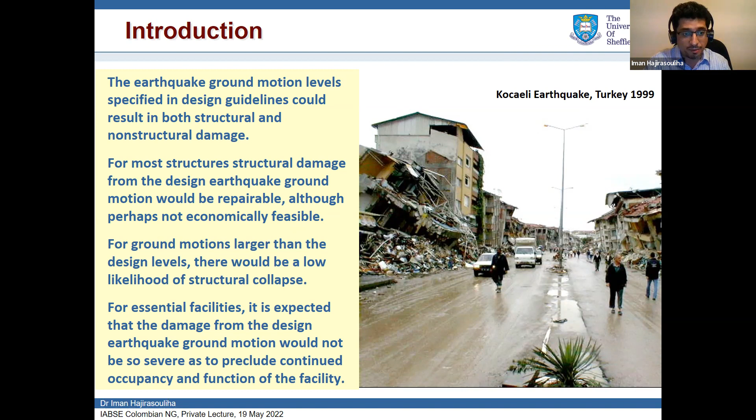The problem historically is that earthquake forces are huge. If we look at other forces applied to structures, like wind load or dead load, we realize that even in the worst case scenario, the earthquake elastic forces are up to 10 times higher than wind. This means we need to find a way to deal with earthquakes. We cannot just design our buildings like we do for other types of loads, for a load that is that strong. So how can we deal with this idea?

There are different ways. One is to isolate our buildings, using base isolation systems that are widely used in some countries. This is not in the scope of my talk, though I'm very interested in that area as well. The other is to increase the damping, absorbing energy using energy dissipation devices. Again, this is not the topic of this talk. Actually, in my next presentation, I will focus on this.

But in normal circumstances, for normal buildings, what we do is design them against a load that is really strong, so we accept some level of damage. We accept that some part of the building will be inelastic. What we do is control this damage so it occurs in the locations we want, so it does not harm, injure, or kill people, and it's restricted to the limits we want. That's the whole idea of seismic design.

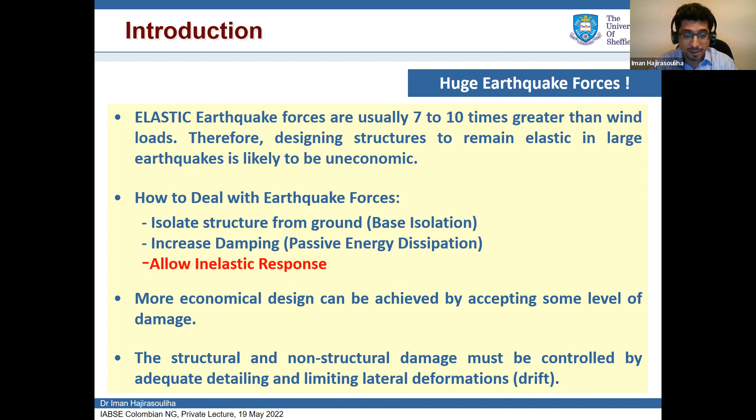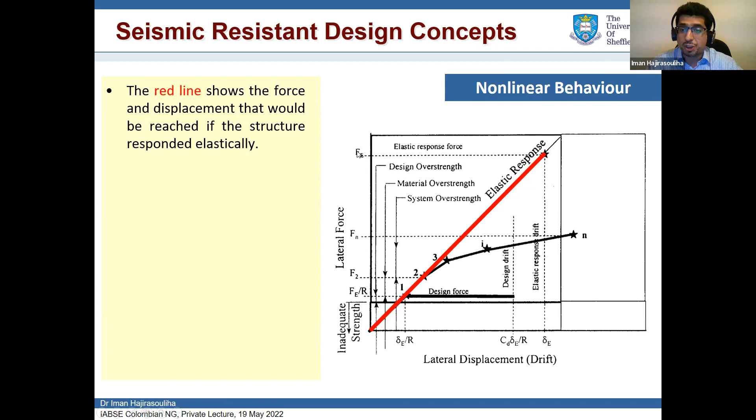Now, this slide is very interesting. I look at the load-displacement curve. If the system is elastic, this is the red curve; everything would be elastic. But this is the load we need to design our buildings with, and it's very high. It means the building would be very strong, with large sections, a lot of reinforcement, or large sections. It's not possible.

If we accept nonlinear behavior, if we accept damage, it means instead of this load, we can design with much less, half of that. It's good because the structure would be lighter, with less material. The idea is that I can make the structure weaker but accept some level of damage, and I can continue doing this until I reach this pink line. At this line, if the structure is weaker, it will collapse completely.

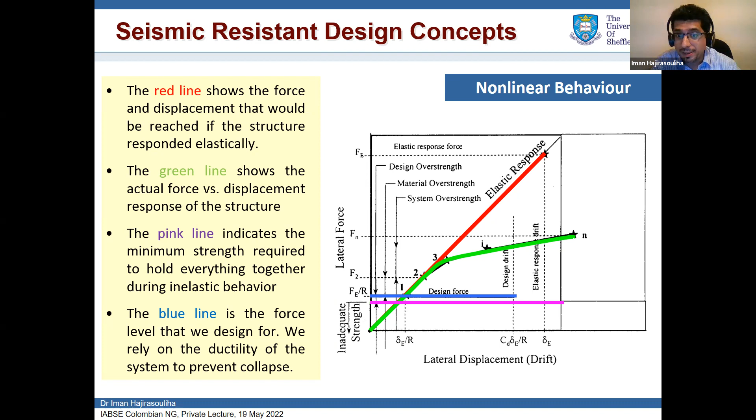So what we do in seismic design practically is that we select a line that is above the minimum threshold. Instead of designing with FE, that is elastic load, you can design with a load much less than FE. It is FE divided by R, where R is the behavior factor. We have it in all seismic design guidelines. So practically, you divide the load by a factor that is generally 6, 8, even 10. You reduce the load, design it, and hope the damage would be acceptable. But can we guarantee that? No, because normal design doesn't give us the tools to do that.

Now this is not that important. I'll go to the different methods we use for design of buildings to calculate the loads in elements. We have it in all design methods. First is linear static procedure, which I explained about. Then linear dynamic procedure, which by itself can be response spectrum method or time history. And nowadays in performance-based design method, we use nonlinear static, which I also explained. And the most accurate one is nonlinear dynamic. I'll go through them quickly and tell you the differences, advantages and disadvantages.

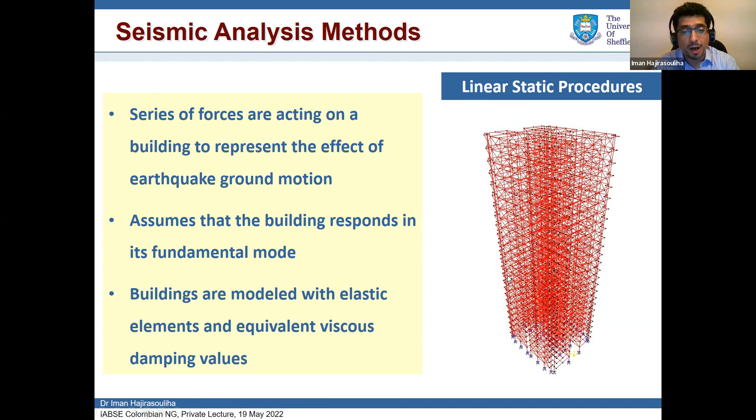Now, linear static means that I apply the seismic load as an equivalent load. It generally assumes that the first mode of vibration is dominant, and the structure is elastic. So basically it's not very good for tall buildings because the effect of higher modes would be dominant. I'll show you how it works.

This is the building, and this is the way that we distribute the load. So we say this is the earthquake, ground vibration. We distribute it, generally with an equation or linearly, and then we analyze it. From now on, the earthquake load is like wind load, any load applied laterally, and you can do it with any software or hand calculation and design. But we know that the effect of higher modes is not considered.

So codes suggest a better design method, response spectrum. What does it say? You have the response spectrum of your earthquake for your location. For example, for Colombia, I'm sure in your seismic design guidelines you have it for different regions. You know the period of the vibration modes for your structure. You do a modal analysis, find the response for each mode, and combine them. Again, the structure is elastic, meaning you assume there is no damage in the building. So practically, you have to reduce the load.

So here is the first mode of vibration, I find the response. Here is the second mode of vibration, I find the response. Here is the third mode of vibration, I find the response. And then I combine these three by using a method like SRSS or CQC very easily.

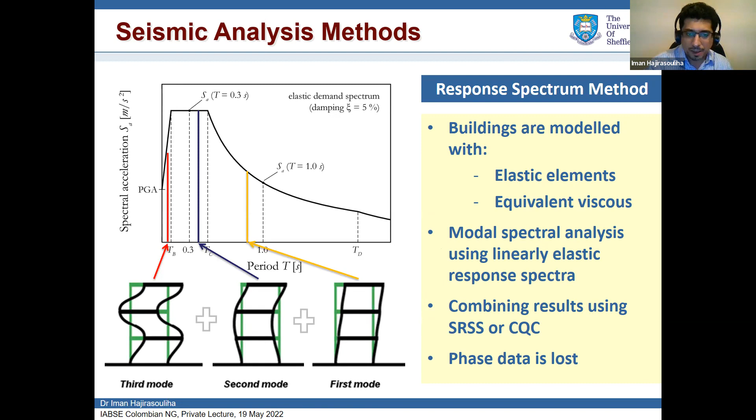But a more sophisticated elastic analysis is to apply the seismic load and perform time history method, linear dynamic analysis. So I show it again. It means you solve the dynamic equations directly. If you had structural dynamics, you'd have heard of the Duhamel integral. If you don't know, that's absolutely fine. The equations of motion will be solved directly. This is good because the analysis is more accurate, and the effect of higher modes is considered.

This is bad because you need an earthquake record instead of a response spectrum. And for seismic design, we are not sure what would be the next earthquake. Do we know? We don't know exactly what the next earthquake record would be. So this will be challenging. Which earthquake record do I have to use for design? Yes. And also, the structure is still elastic.

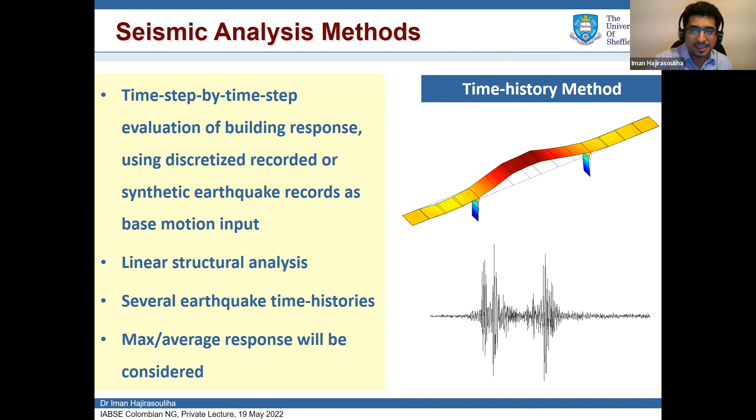So the seismic design codes, the performance-based design codes, started thinking of a method that is easy to do but also more accurate. We want to know the behavior of structures when they are nonlinear, when we have damage. So what they basically propose is pushover analysis, or inelastic, basically a static analysis.

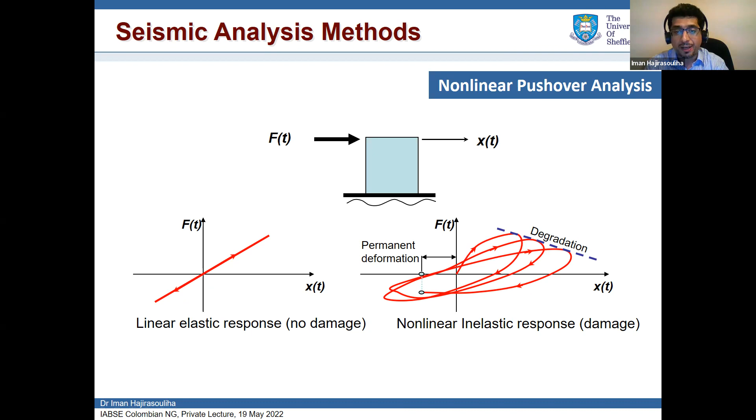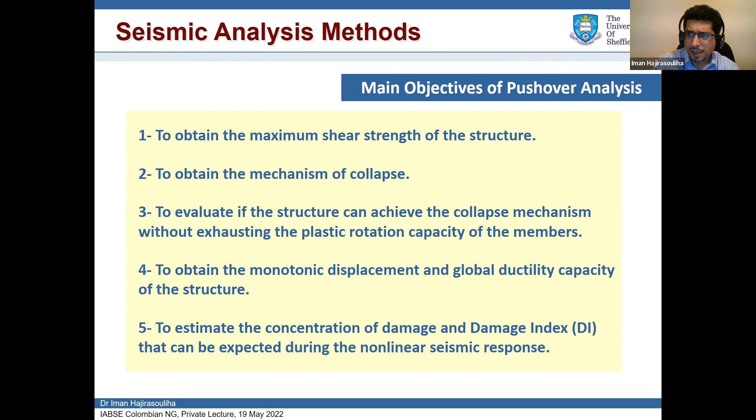I'll give you an example. Oh, sorry. These are the limitations. What are the limitations of this method? The limitation is that it still looks at the first mode of vibration. It means that the effect of higher modes is not considered. If you look at 3D systems that have torsion, irregular buildings like this one, it can't really work very well. There are methods to address these issues, but those methods are still not very accurate, and they are in progress. So pushover is generally good, I would say better for a 2D system when it's regular.

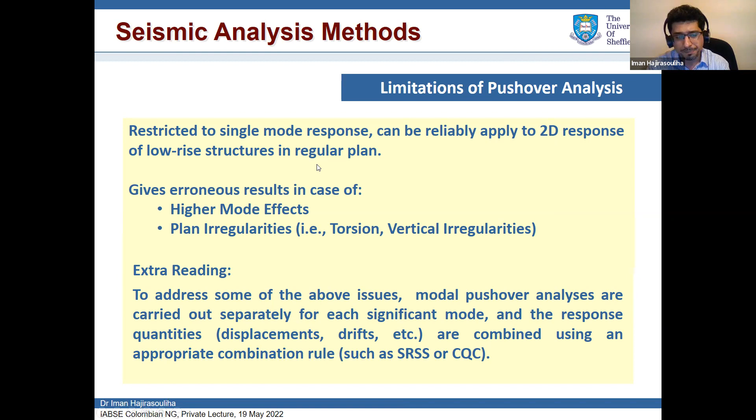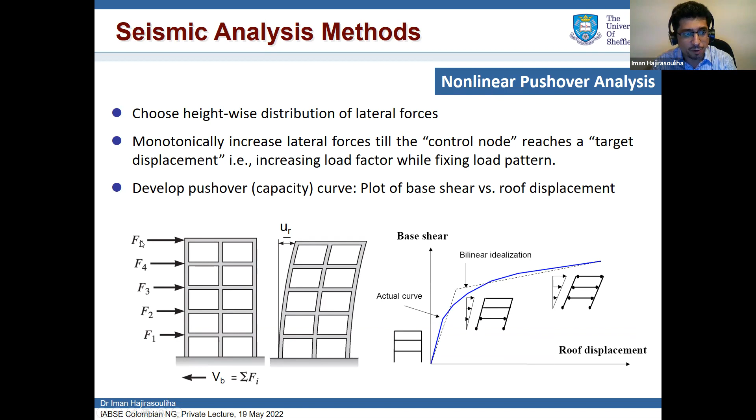So basically, by doing pushover analysis, I can find the overall response of the system. But the codes tell us that when you do the pushover analysis, you need to choose a lateral load here, F1, F2, F3, F4, F5. How do you distribute it? It's up to you. You can use uniform loads, triangular, modal, and unfortunately, the final response depends on the type of the load that you consider.

Now, I have an example. I asked one of my students, like you that are sitting here, to perform pushover analysis using three loads. This uniform load, this one, okay? Then this triangular load, this one. And then this is mode one, this one. So basically using these, we want to compare the results.

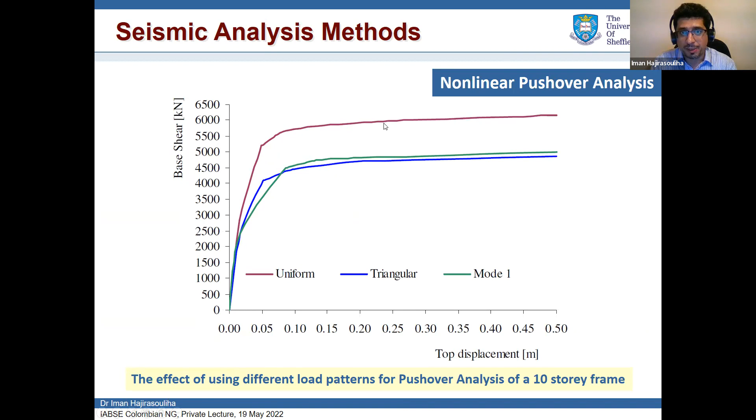Perfect. So, I was saying that pushover analysis, that we will use later on, is good, but the problem is that it depends on the lateral load that we use. And that's the reason the code says use uniform, the red one, and either of these two, and use the maximum response. So the actual response will be between these two. I will get back to that.

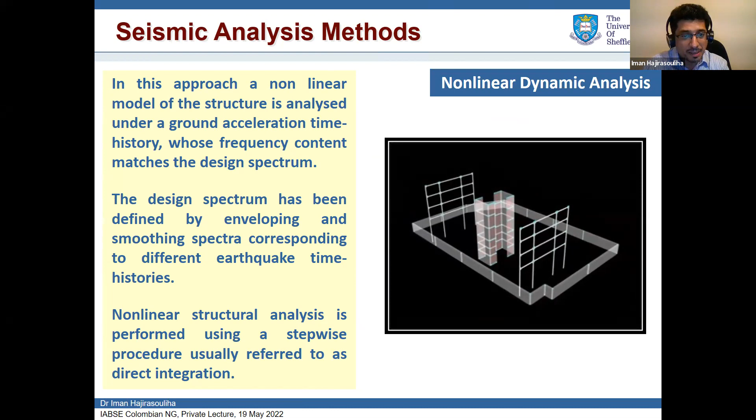The nonlinear dynamic analysis means that I have my model accurate, everything is nonlinear, and then basically I apply the seismic load and analyze it. The problems are, first of all, if we want to do that, we have to model the structure in an inelastic way, and we need a lot of information about parameters and the elements. And also, we need to have the earthquake. I told you, we can't predict what would be the next earthquake. There are methods for this. I use it a lot for my research, synthetic earthquakes, but there are problems with them. So I told you we need to know the details for this.

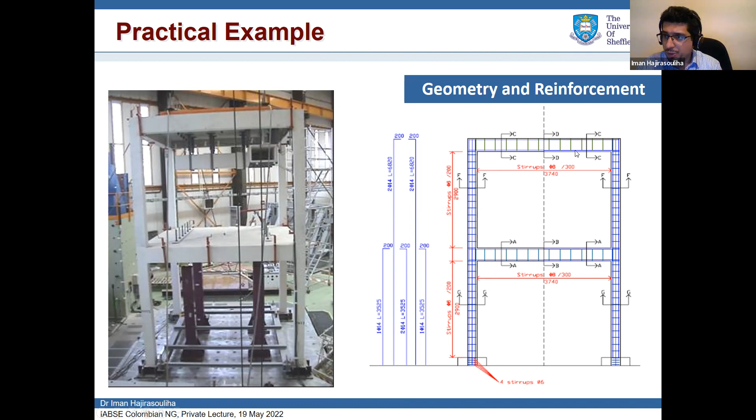Okay, this is the building that we tested on a shaking table in France. We were leading the project from Sheffield, and it's the largest shaking table in Europe. So this is a full-scale building, 2-story, reinforced concrete, RC building, and this is the detail. So we did the test, and we increased the acceleration of the ground, the PGA. We realized that first, we have damage at the joints on the first story, horizontal cracks. Then at the higher PGA level, we had cracks at the base. And then after reaching the maximum design, we had complete or deep damages again on the first story column. So we had the damage pattern.

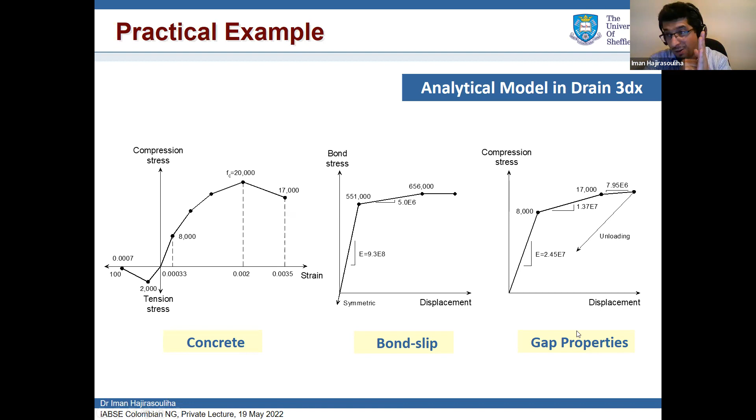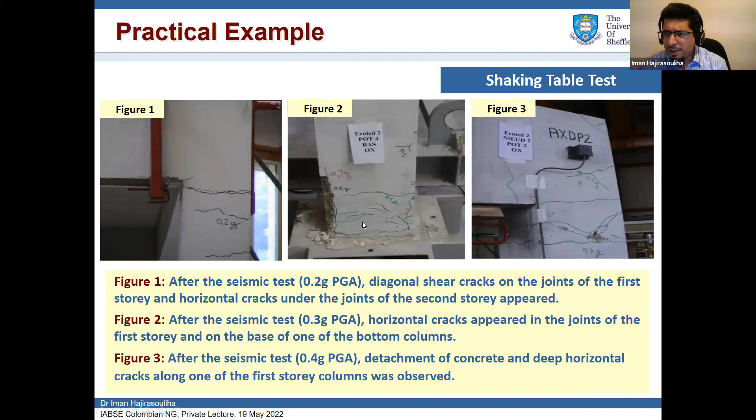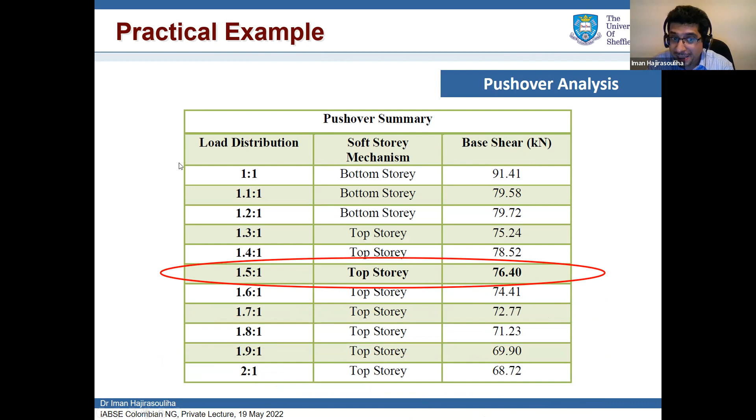I realized that actually the answer was this one, the best answer. Something between the two loads that the code asks us to consider. And here, the best answer. So if you do 1 force here and 1.5 times the force here, something that is not in the code, you realize that the order of the damage would be more reasonable. Damage here, damage here, damage here. So it's very close to what we saw in the tests.

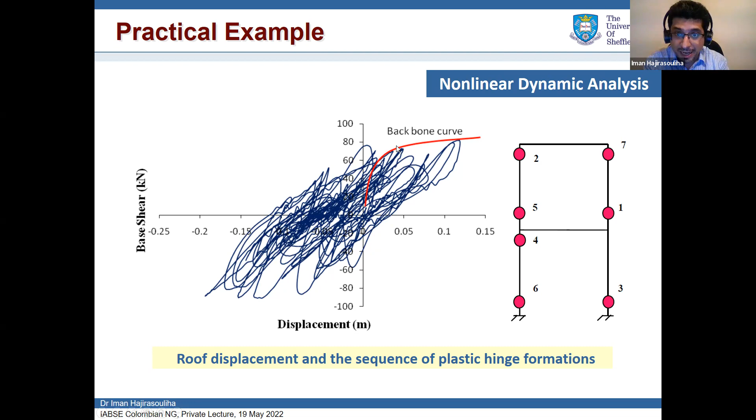Then we perform nonlinear dynamic analysis. This is the test in the shaking table, the blue lines. And this is the pushover. When we push the structure, you realize that the answer of the pushover analysis is like an envelope, a backbone of the cyclic response. So to give you an idea, because I use pushover later on for performance-based design, pushover gives you an envelope of what is happening during an earthquake. It's an easy method, is accurate enough, and is much simpler than nonlinear dynamic analysis.

Now, I asked my students to perform nonlinear dynamic analysis. You can see here the response of the structure; the actual response is the red line, and the blue one is the one that our model gave us, at different PGA levels, first story, second story. We published these results. You can look at my papers. You will see the agreement is great. So my models could predict the behavior of the structure with a very good level of accuracy. So these models, nonlinear dynamic analysis, can be very accurate. What is the problem? I told you, you need to have detailed information of the material and also the earthquake, something that we don't have.

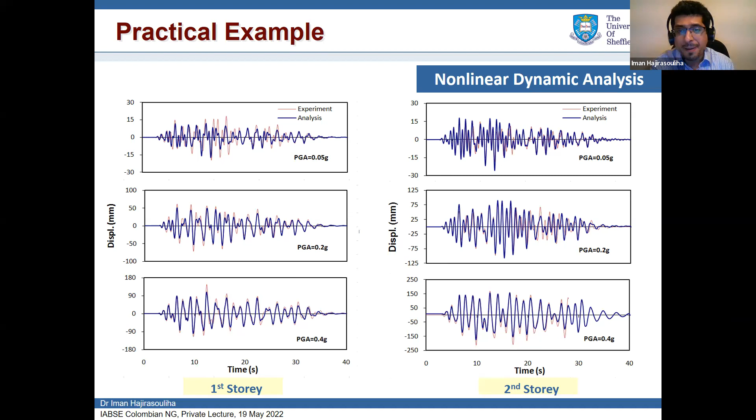So these are the methods that we use for conventional seismic design. The elastic ones, the first two, are not really used for performance-based. Pushover analysis and nonlinear are more accurate. They consider the real behavior of the structure, and they are the methods that can tell us what is really happening in the building, so we can use them for design purposes.

We go to the next step of my presentation, ductility-based design. Ductility-based design is relatively complex. You have my videos. If you want a copy of my lecture notes, I'm more than happy to share with you. But because we had some delay, this part I go faster, okay? I don't teach you the details. This is very interesting, but it's a little bit advanced. It's more for the MSc and PhD students. If you like, you can contact me later and ask your questions. So don't panic if you don't understand well.

So I start with the definition of ductility, and then I focus on the behavior of the system based on ductility design. The concept of ductility design is important because I use it in performance-based design. It says that I am happy to accept the damage. We cannot assume buildings remain in the elastic range in large earthquakes. Why? If you want to design a building to remain elastic in large earthquakes, you have to use very strong sections, columns 3 meters by 3 meters, a lot of reinforcement. It's not economic. We can't use that.

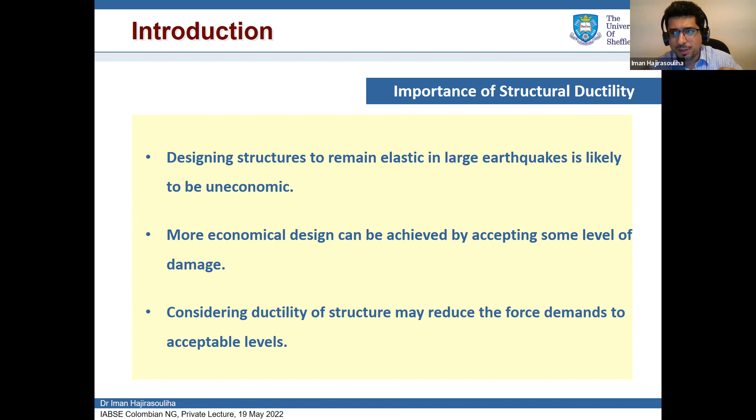So what we do, as I said at the start of my presentation, we accept damage, but in a controlled way. But what is the problem of damage? When I have damage, I may have a reduction in the capacity of the building. How can I control it? With ductility. Some buildings can accept a lot of damage. Some buildings cannot. So I have to control the damage in a way that the building does not collapse. The parameter that helps me to control the response of the structure is ductility. So that's the whole idea.

There are some key design factors. Remember these ones. Plastic hinges should form in the beams before columns. So I want plastic hinges in the beams, not columns. Do you know why we don't want plastic hinges in the columns? We want them in the beams. If you know, you can even answer in Spanish. Someone translates it to me. Anyone? Why don't we want plastic hinges in columns? It says bad. Plastic hinge in column, bad.

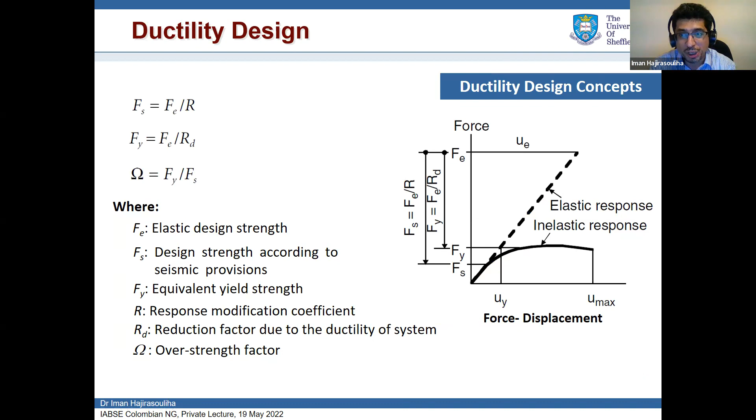I don't go through the details of the ductility design that much, just I explain that based on the ductility of the system, we reduce the load and we rely on the nonlinear response of the structure. And it's important to consider all of these points to ensure the structure will survive, will not collapse.

I use the same idea of the ductility. Ductility is the maximum displacement divided by the yield displacement. I just explained that the area below the elastic and inelastic system can be equal. And if you do that, you can find very simple equations. I'm sure my students hate it when I say simple because they are not simple. You can have some equations that relate these parameters to each other.

You are lucky that I'm not going to spend time on that, and I'm not going to ask an exam question from you. So very quickly, the whole idea, as I said, I don't have time to go through it in detail. I'll just give you a flavor of that. They look at the response spectrum. This comes from the code, like the Colombian code, okay?

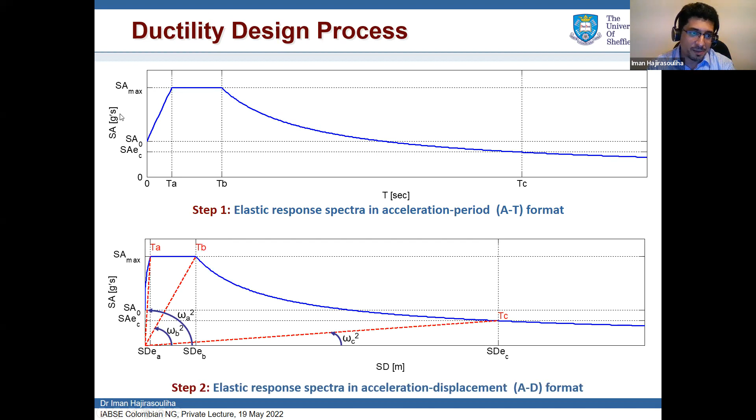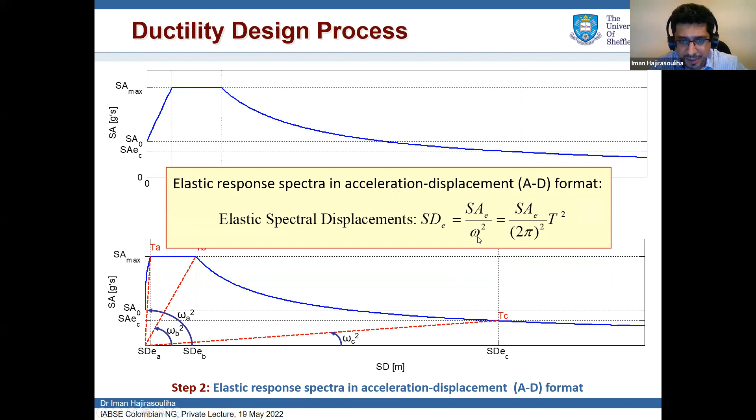Then they change it to the response of the acceleration versus displacement. It's very easy. An Excel file can do that. And generally, we use the simple equation that the displacement spectrum is the acceleration spectrum over omega squared, where omega is 2 pi over T, the period of the building, the frequency of the system. So I change it to this one.

Then I add the inelastic to the elastic behavior. How? There are different methods. I generally suggest a very simple one. You divide the elastic response, the blue line here, by a factor. That factor is expressed by this equation. It is 1, then it reaches up to the ductility. I will show you later on.

And based on the target ductility, ductility 2 means almost brittle. Ductility 4 means medium ductility level. Ductility 6, 8 means that the building is very ductile. For example, if you have a reinforced concrete frame with very good links, it's ductile, it's ductility 6. But if you have a reinforced concrete frame that does not have shear links properly, the material is bad, you can't really accept ductility 6 or 4. You go for ductility 2.

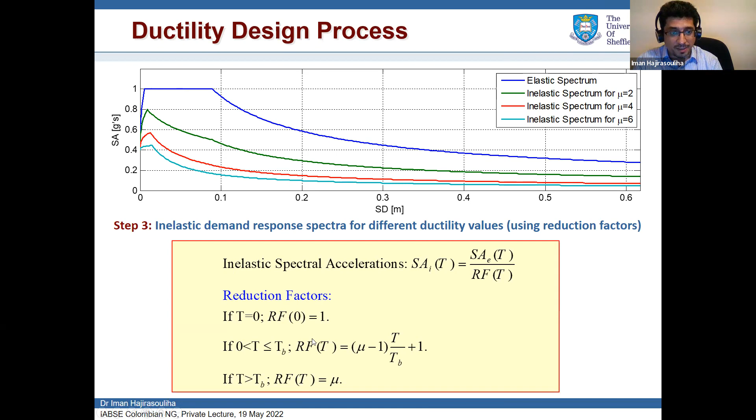And in that case, basically, you just divide it by this equation and you get the inelastic response. So it is this one. This is the equation that I used to change the elastic response, the blue one, to the inelastic response. And this is the simple equation that I told you here. If you read the notes, you will realize.

So basically, the red one is the blue one on the top divided by this factor. At each point, when you divide it, you get the red one. The red one is the inelastic behavior of the structure, the actual behavior of the structure. Now, if I want to know basically what is the response?

Can you wait again a minute, please? Oh, again disconnected. Yes. I'm having problems again. We don't know what's happening, so give us 5 minutes, please. Sure, I'll wait.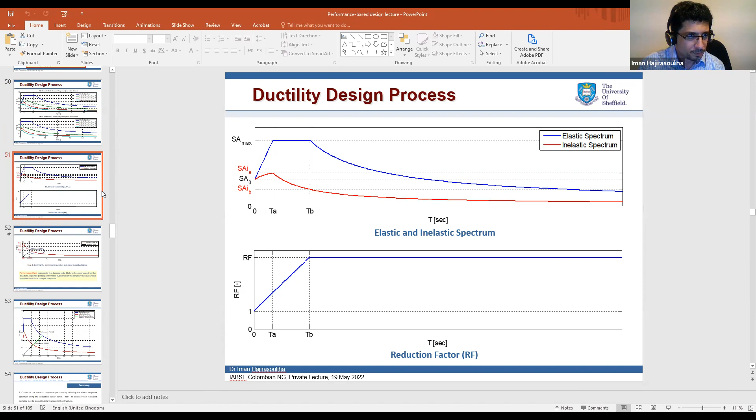And the presentation, it gets nicer, more pictures and colorful. No, but it's very nice. It's going very well. Thank you very much. Thank you. Yeah, I don't know what's happening.

Probably not only the computer, but also the video beam, the projector, is having an issue. I don't know what's happening there. Maybe a short circuit or something like that. I don't know what the circuit is.

Yeah, we were thinking to give them a break, so this is a break for them. Exactly, a break, yes, a coffee break. For me, because it's too late, I went for decaf tea instead of coffee. I had to sleep after that, yes.

Exactly, not coffee at 11. No, at 11 I can't go for coffee. Well, in my case, I can drink as many cups as I want, no matter the time, and I can fall asleep immediately. Really, no problem. But at night, no - I generally drink 6 to 8 cups of coffee per day.

Okay, but not anything after 4 p.m. So after 4, I stop. No coffee, otherwise I can't sleep. Yeah, some people live on 1 cup in a whole day - if they drink more they can't sleep. It's true, yeah, they can't sleep. Actually, my colleague was saying exactly this morning.

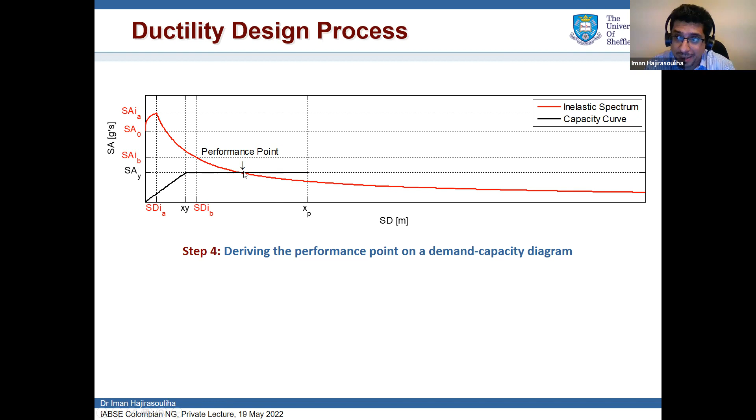An intersection of demand and capacity is the performance point, is what will happen to the structure. And it's good because I can perform pushover analysis, push the structure to the performance point and exactly see what is happening at that point. So I use that concept, the ductility concept, to find the response parameter and also to find what is happening to the structure. From now on, hopefully the presentation would be nicer, okay? So less equations and fun. Let's look at the case.

Now, I chose that one on purpose. If the structure is inelastic, we have to look at the red curve and the black curve. And the performance point is here, yes? What is the displacement? It's between 10 and 20, yes? Shall we say 14? 14 centimeters.

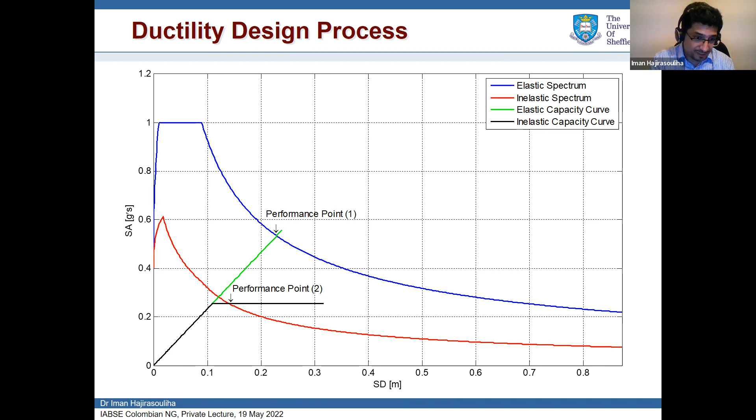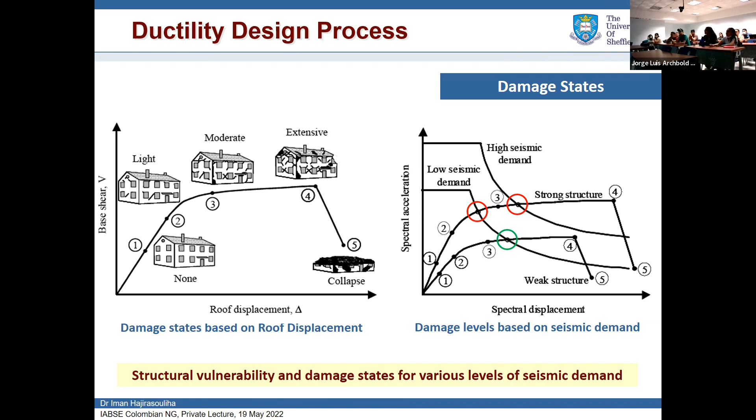What's the difference between the weak and strong? Like, what is it - one is brittle and the other one's not? Like what, or is it just the strength?

A very good question. Between the two buildings, it's true that the strong one has higher capacity and higher ductility - so it is both stronger and more ductile. The weakest structure has less capacity and is also brittle.

The two earthquakes that we use in the design codes - the low seismic one I call the design basis earthquake, DBE, and the high one is the maximum credible earthquake, MCE. So generally the normal buildings are the one on top - good buildings. The bottom one is a bad building.

In the low earthquake it was heavily damaged, extensive, as you told me. And in the strong earthquake, it did not intersect - it means that it collapsed. So the second building basically collapsed before reaching that point. It means that it is a bad design, both in capacity and ductility.

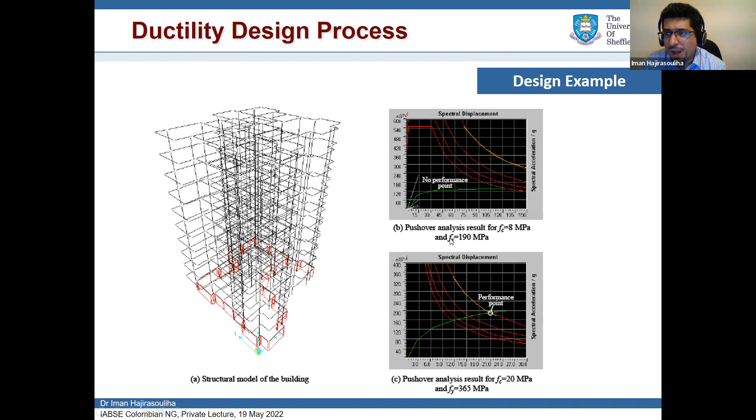Good. Now I go to the third part of my presentation: principles of performance-based design. We realize that in the normal design process, we try to control the damage. How? We assume the structure is elastic.

We reduce the load by behavior factor, and we analyze the building. But we do not have any means, we do not have a way to control the damage. Performance-based design is a concept that can help us control the damage at locations in a way that we like.

I start with the design guidelines, a little bit about the performance levels and earthquake classifications and objectives, and then how we model it and how we can perform performance-based design in a practical application. And I'll show you a very simple example.

So performance design is helping us control the damage both in the structural and non-structural elements - it helps us control the damage to the level that we like.

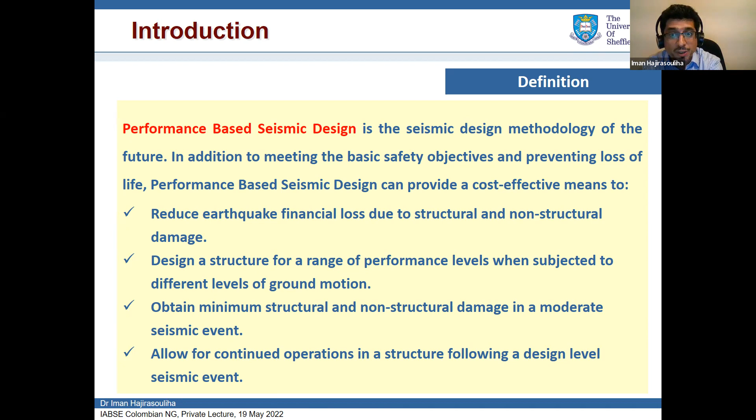So you have the power to control the damage. And also, based on the different types of structures, you can have different levels of acceptable damage, and you design it exactly the way that you like. But the problem is that you need more sophisticated methods to analyze the response of the building, but as we just discussed, we can use pushover analysis or nonlinear dynamic analysis.

Performance-based design started a long time ago, when I started my PhD, and I don't tell you when because you'd realize how old I am. Actually, I can tell you. In 2000, the first version of performance-based design came, and my PhD was on performance-based design. And I remember people were telling me it's too fancy, no one is going to use performance-based design. I remember I had this discussion in Sheffield with my colleagues. They were telling me you are wasting your time. And they were wrong. I was absolutely right.

Performance-based design is the future of seismic design. And all the design guidelines are moving towards performance. Now we have a new generation of seismic design, performance-based design methods, ASCE codes, and different countries adopt different versions and different forms of that. So this is the future of earthquake engineering and it is very well established, 20-something years after I started my PhD. Now, let's discuss.

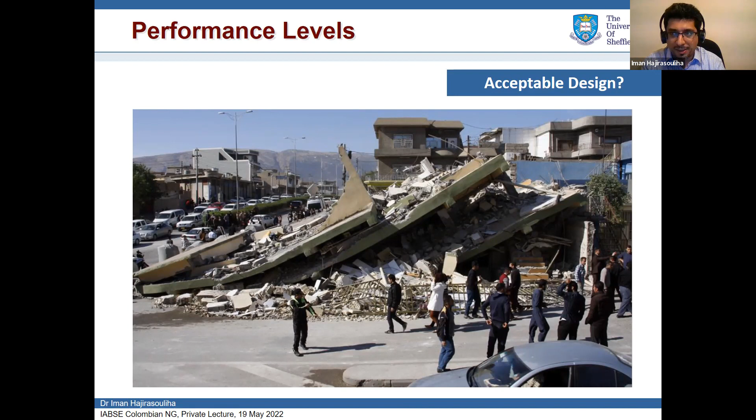Now, we define different performance levels for buildings based on the level of damage that we observe in the structural and non-structural elements. The first performance level is called operational. It means that we have negligible damage, very little damage. If it's a hospital, after an earthquake the hospital can accept patients. It can work with no problem. The second one is immediate occupancy. They call it IO. It means that the structure is lightly damaged.

If you're in your building and an earthquake happens, it means that you can repair your building quickly. And I always give this as an example. If an earthquake happens in my building and it's immediate occupancy, it means that I can sleep in my bed tonight. You know, I should have my own pillow. If I change my bed, I cannot sleep. So if an earthquake happens and it's immediate occupancy, it's good because I can use my own bed and I'm happy with that. Yeah.

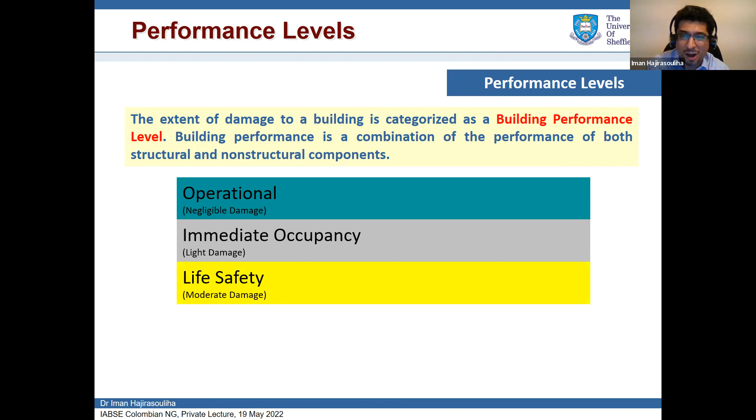Life safety is moderate damage. It means that the building is damaged in structural and non-structural elements, but it tries to protect people's lives as much as possible, limiting injuries and mortality. So it is the design that we generally target for normal buildings when we design them for earthquakes.

Collapse prevention means that the structure is heavily damaged, but it's not collapsed. So generally, at life safety the building is repairable, but at collapse prevention, no. Many people unfortunately die, but at least the building does not collapse. And collapse is bad, it's red. Sorry, I put it in black. It's bad. It means the end of the story, and we don't accept it. We can't accept collapse. Agree? So this is the definition.

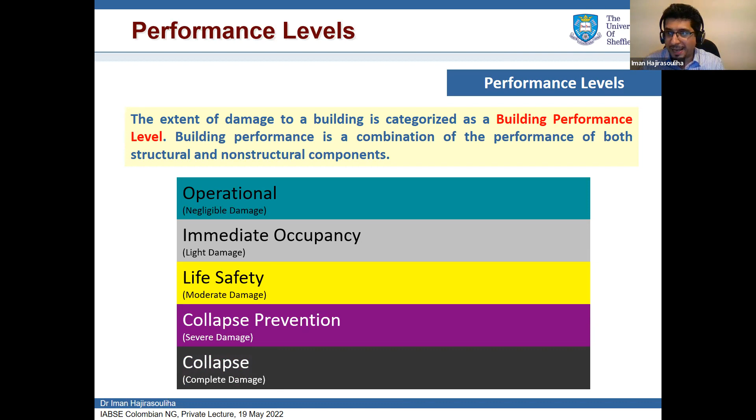Now, let's look at it a little bit more. You know, you don't have Costa coffee. Yes, most probably you have a Starbucks. Do you have a Starbucks there?

Do you have coffee? Yeah. Yes. Imagine that, a Costa. Oh, okay. Costa is the UK's Starbucks. Okay, it's everywhere, and I love coffee. I drink coffee like crazy. So this is a Costa tea.

So basically, when the structure is fully operational, it means that after an earthquake, you can say that, okay, we had an earthquake, let's go and have a cup of coffee. Fully operational, you go and you will have your coffee. Immediate occupancy means that after the earthquake, your favorite coffee shop is damaged, but it can be repaired. You don't see any serious damage. We can say that it's closed today, but next week I will have a cup of coffee. But for collapse prevention it is extensively damaged, and you have to find another coffee shop. Your coffee shop is gone, unfortunately, and it's not repairable.

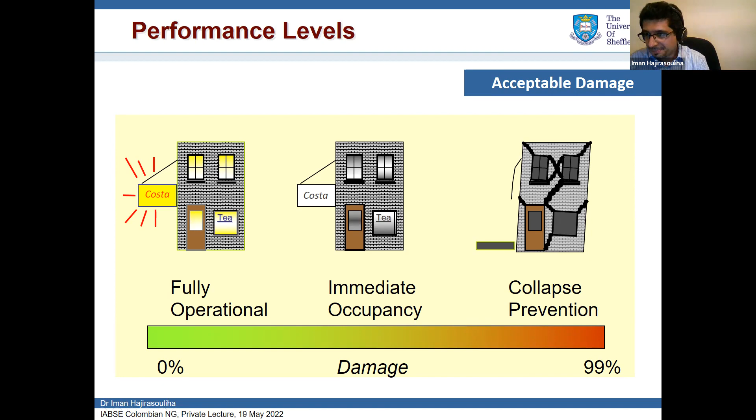So let's provide more detailed information. We are engineers, so let's discuss. Operational: no permanent drift should be observed. The structural components should keep their strength and stiffness. So no extensive damage. Facades and partitions may have minor cracking, but not the structural elements. And all the important systems should be operational. You should have light. I told you it's a hospital. So basically, after the earthquake, they may accept patients. They may do surgery. So all the necessary parts should be working.

Remember, I will ask you questions. Okay? Listen to me. I will ask questions soon.

Immediate occupancy means some damage, but not extensive damage, some minor cracking. Elevators should be working most probably, and the fire protection system should be operable. The structure keeps most of the strength and stiffness. Some level of damage is acceptable. Life safety: the structure's strength and stiffness is reduced, but you have just some residual strength not to fail. The gravity load bearing capacity should be intact. So the gravity load bearing elements should be functional.

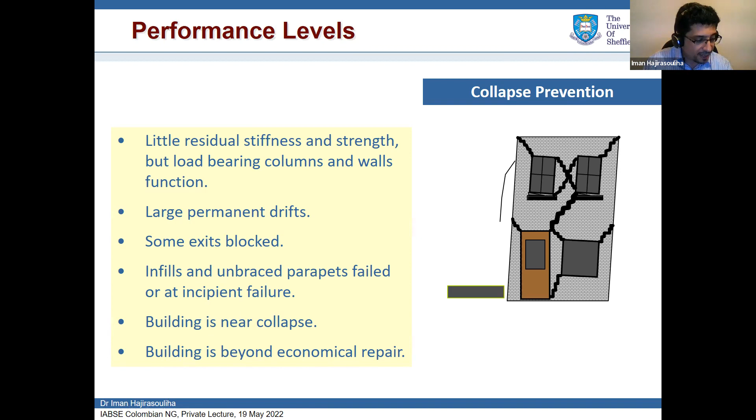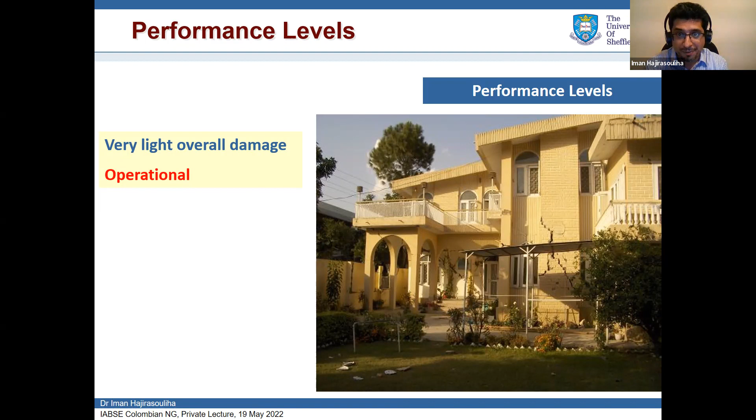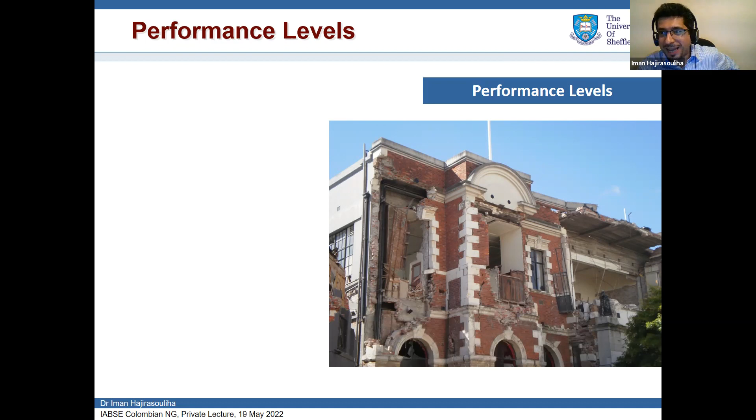This one. Who thinks immediate occupancy? No. Who thinks life safety? Some of you. Who thinks collapse prevention? Some of you. Who thinks collapse? Of course, it's not collapse. I like it. I think you are a little bit more careful than me. I accept more damage, you don't. To me, it's life safety. There is some damage here in the building. To me, it's life safety. What about this one? Who thinks it's life safety? Who thinks it's collapse prevention?

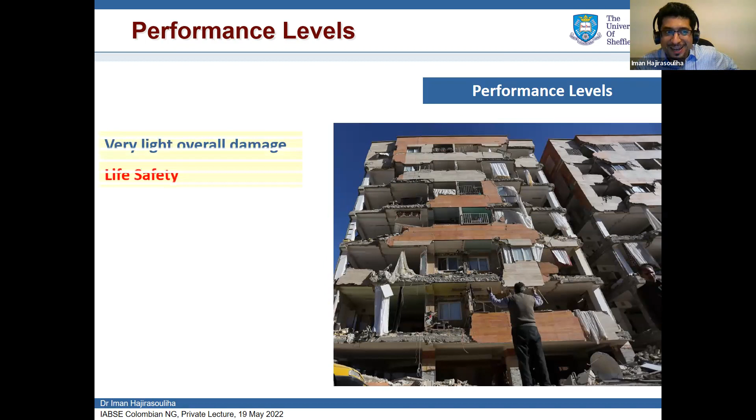Really? To me, it's still life safety, guys. I like it. So to me, it's not close to collapse because you see the columns are intact, the connections are okay. The failure was mainly due to the walls. So to me it's maybe life safety, not too much towards collapse, but it can be collapse prevention as well. Okay, I agree.

What about this one? Let me tell them something real quick.

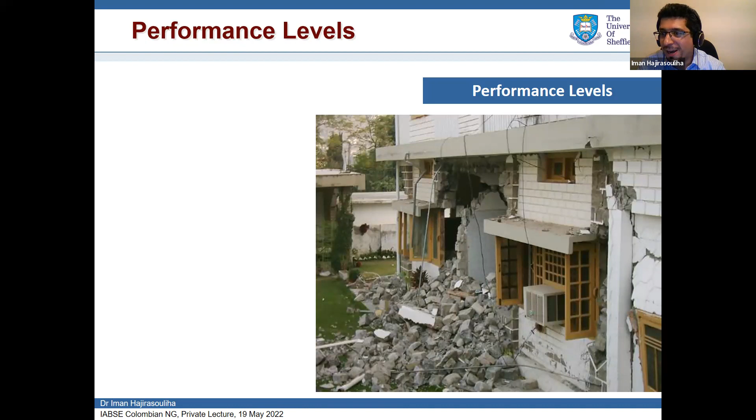Okay. I was just trying to explain a bit of the difference between the two. Perfect, perfect. And please feel free to jump in and help. Thank you. So this one, who thinks it's life safety? Who thinks it's collapse prevention? Who thinks it's okay? Some of you. Who thinks it's collapse? So again, to me, it is between life safety and collapse prevention. I would say life safety, to be honest, but some of my colleagues think it's more than life safety.

Again, look at that. Some of the walls fell over, but the exits are open. Yes, the columns and beams are intact, and the building is not close to collapse to me. So it is excessively damaged, most probably at the end of the life safety region. Okay, maybe it goes to collapse prevention, but mainly life safety. So I'm choosing these one by one, every time a little bit more damage.

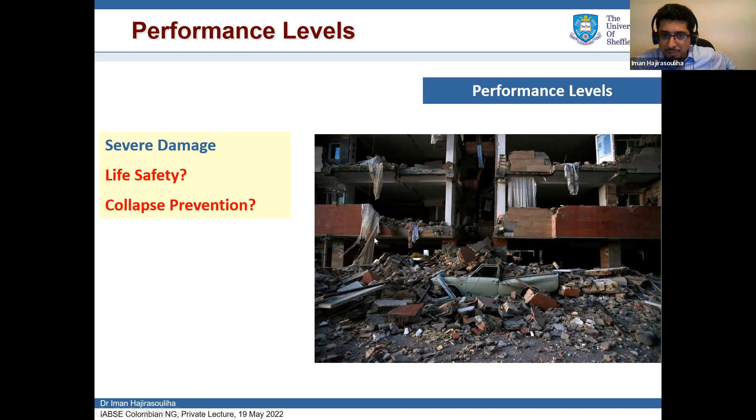What about this one? Who thinks it's life safety? Who thinks it's collapse prevention? Okay, good. I agree with you. I think this is more towards collapse prevention, because it is heavily damaged and a lot of walls fell over. So for this one, to me, it's collapse prevention. This one may be in between. What about this one? Who thinks it's life safety? Collapse prevention? Perfect. Collapse prevention. Well done. What about this one? Who thinks it's collapse prevention?

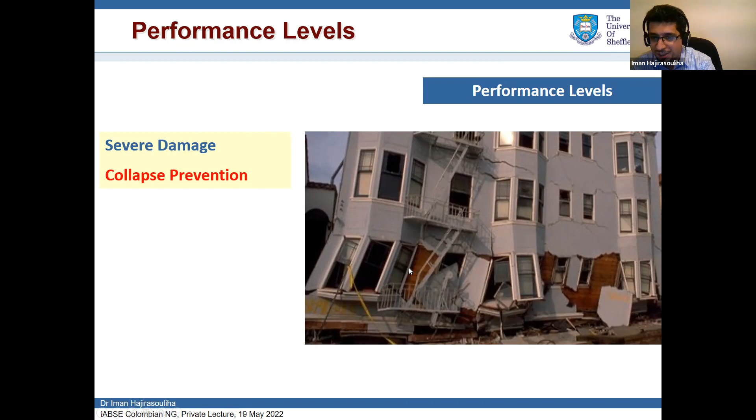Professor, in the previous photo, didn't it collapse already? Isn't there like a soft story? A very good one. I don't think so, because to me the story remains the story. It's a little bit deformed, but it has not disappeared. Unless you see something here? Yeah, that looks like a whole floor collapse. If something is like this, I agree, but the picture is not very clear. If one story collapsed, totally agree, it's a collapse. I thought that was a little bit of damage. If it's like that, yes, it goes to collapse prevention. Very good point.

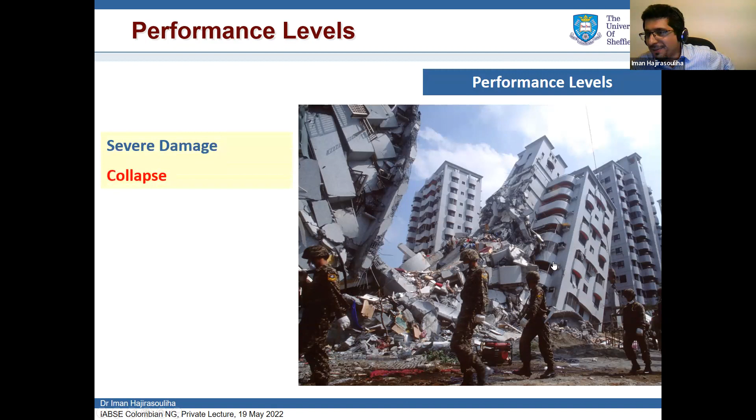What about this one? Who thinks it's collapse prevention? Who thinks it's collapse? Yes, it's collapse because this part of the structure fell over. So it's already collapsed. Agree? What about this one? This building, I think it's easy. Yes, it's collapse. And the most difficult one is this one. What do you think? Obviously collapse. So you notice that for some of them we agreed, for some of them no, because we talked about the behavior in a general way.

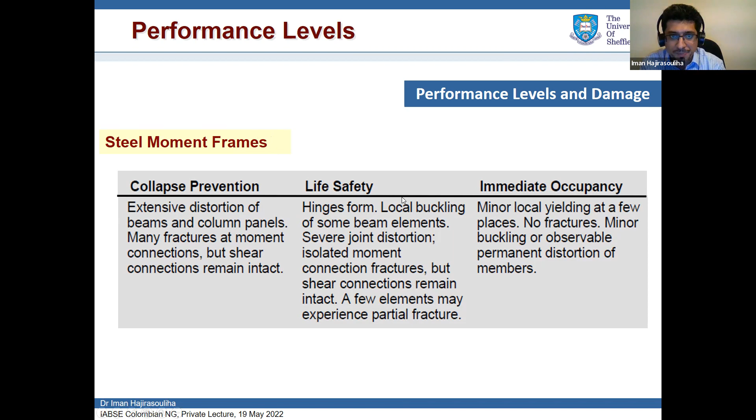They have the same tables, for example, for steel moment frames. It talks about local yielding, local buckling, connections. I don't have time to read all that; you will have a copy of my presentation. Based on the behavior of the hinges and connections for steel moment resisting frames, you can categorize them in different groups. And for braced frames, it's based on the yielding or buckling of the braces and the connections, so you can determine immediate occupancy, life safety, or collapse.

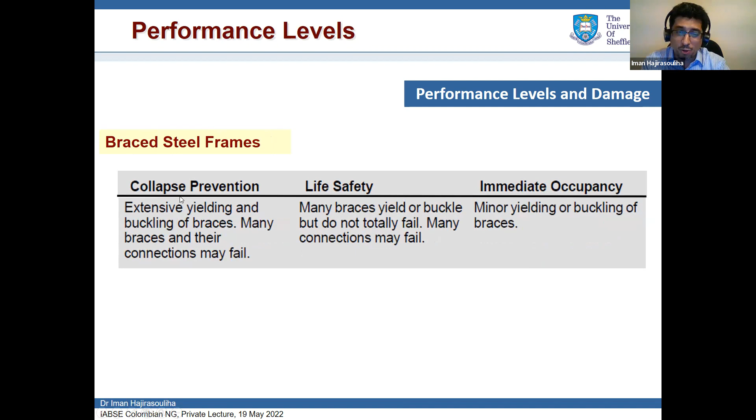So these ones, when you go to the site, you look at these things, you can understand. But there are better ways as well, especially if you use analytical models. There are two parameters that are generally controlled in performance-based design guidelines. One of them is the maximum interstory drift, the lateral displacement of the system. It says that, for example, for the concrete frame, if the lateral displacement is 1% of the height, it is immediate occupancy. If it reaches 2% it is life safety, if it reaches 4% it is collapse prevention, and beyond 4% it is damaged completely.

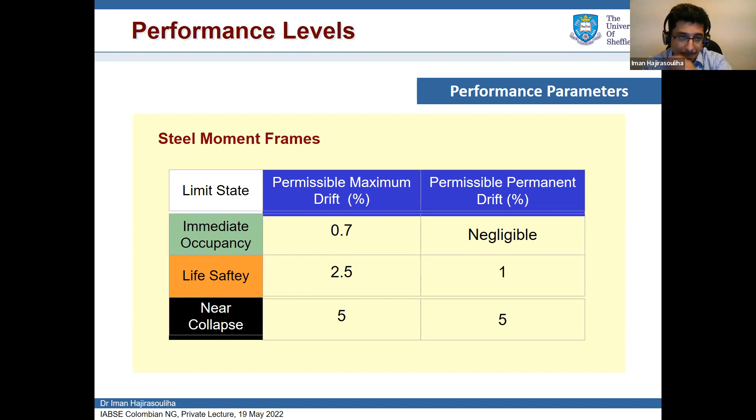And this column here shows the permanent drift. So basically, you analyze the building using pushover analysis or nonlinear dynamic analysis. You calculate the drift, and then you can use these tables and easily say what the level of performance is. This table is for concrete frames. This table is for steel moment frames. These are different numbers because of the way these structures experience damage. And this is the one for steel braced frames. So for each type of structural system, they have acceptable ranges like this.

Good. So we could look at the pictures and, like what I did, argue about the performance. We can run the models or measure the displacements, and based on that, decide about the overall performance. But there is another way as well. We'll discuss it in a few minutes, which provides us more detailed information at the element level.

Now, we discussed the damage and elements, but at the same time, we have earthquakes, and we have different levels of earthquakes. We have earthquakes that happen frequently. The return period, I said, 43 years. It means that if the effective life of the building is, for example, 30 years, there is a 50% chance they happen during the effective life. We have occasional earthquakes. Their definitions are different in different codes. Rare earthquakes, this is the one that we generally use for design. So return period 475: if the effective life of the building is 50 years, there is a 10% chance that we have earthquakes stronger than this. It means that if you design your structure based on this, 90% you are safe.

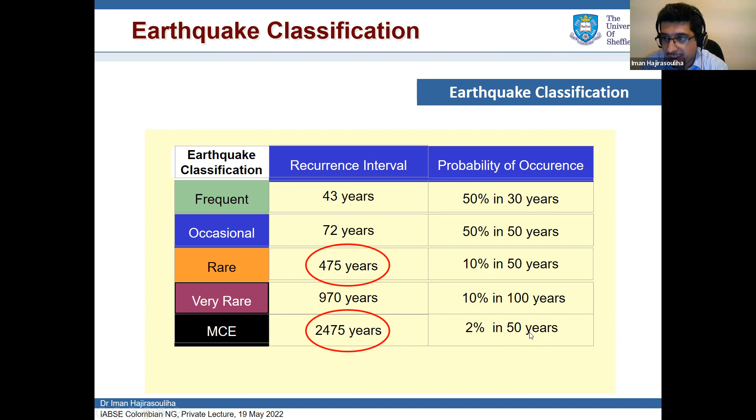So now in performance-based design, this is taken from FEMA. You are dealing with two basic different parameters. This side is the earthquake. This side is the performance of the building. And this vertical line shows how much material I need or how much money I have to pay. So generally, the codes go for these two. They say that we want to control collapse for the very strong earthquake, so the intersection is P. And they control life safety for the 10% chance, the rare earthquake. So this is K.

So the codes, for normal buildings, satisfy P and K. If you look at this nice figure, you realize that if you satisfy P, you automatically satisfy L, H, and D, because if the building has not collapsed under a very strong earthquake, it will not collapse under weaker earthquakes either. If you satisfy K, you automatically satisfy G and C for the same reason. But the others, you don't know. Are you going to satisfy J? Are you going to satisfy E? No. Normal design looks at these two, and automatically these will be satisfied. But in performance-based design, you have the option to design based on whatever you like.

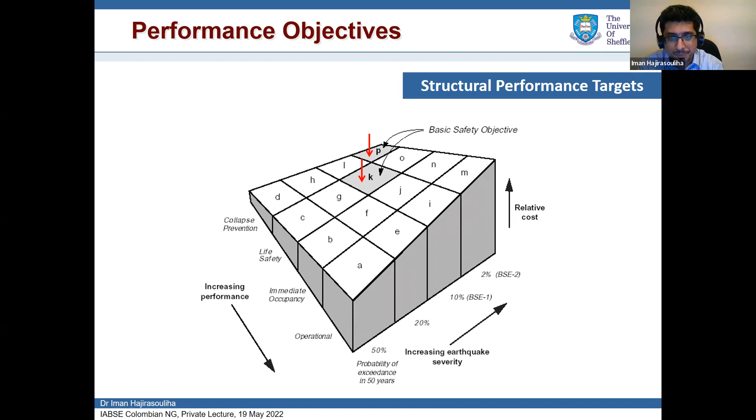Code helps you. First of all, the code categorizes buildings into different groups. Safety critical facilities are those that are really dangerous, like a nuclear power plant; if something happens, they kill hundreds of thousands of people. Then we have essential or hazardous facilities. Essential facilities are those we need after an earthquake, like hospitals, communication centers, police and fire stations. Hazardous facilities are like refineries or oil reservoirs, something that, if an earthquake happens, for example, explodes. The difference is that for hazardous, if something happens, it kills 200 people, and in the other case, it kills 200,000 people. So there are different levels of danger.

And normal buildings, like my house now and your university, are categorized as basic facilities.

Okay. Now the code, the performance-based design codes, they tell you how you need to do design. It says that for basically ordinary buildings like your university, if a weak earthquake happens, it should be at operational level. If the design-based earthquake, this one with the 475-year return period, happens, it should be life safety. If the strongest earthquake ever happens, it should be collapse prevention. So we don't let the structure collapse, because if the structure collapses, no one would expect to leave the building

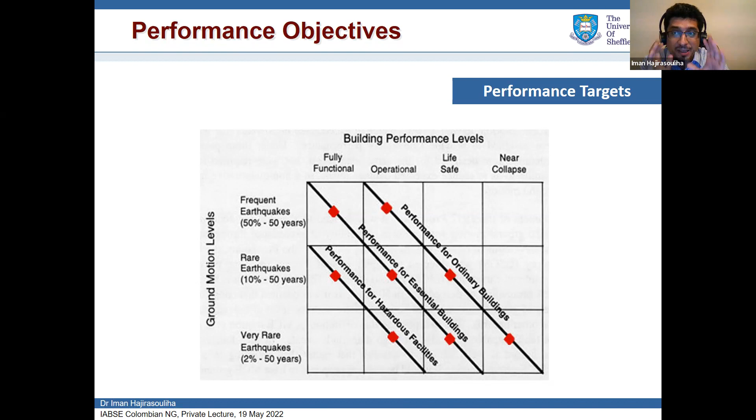Now, they have methods to calculate this maximum displacement. I told you just now, ductility-based design can tell you the target displacement, but there are other methods. I don't teach them now, but there are methods where you calculate a few coefficients, based on the period of the building and coefficients related to the behavior of the elastic-inelastic system, the multi-degree of freedom, and even strain hardening, and you just simply multiply a few numbers and you have the maximum displacement of the system. You can use the FEMA method.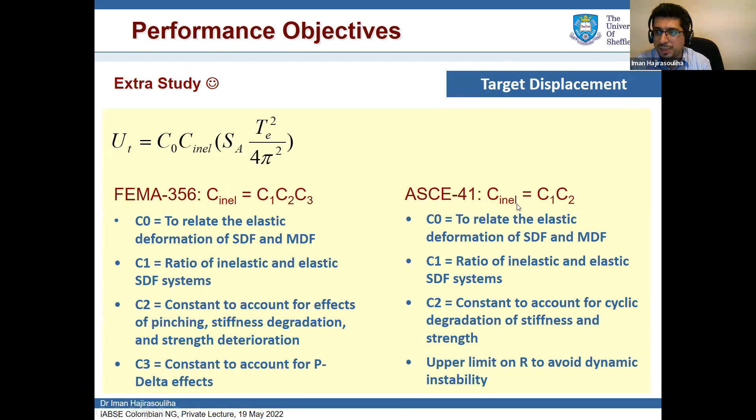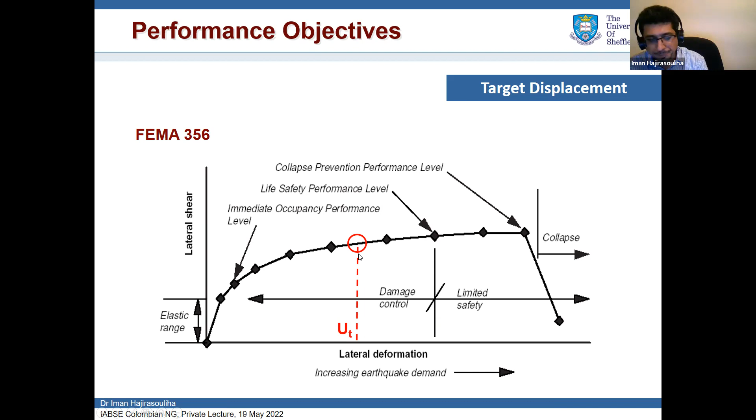And now, basically, to analyze the buildings, we discussed that we use the inelastic response, the backbone curve. We discussed that. And the code helps us to do this. What it does is that the code says, let me help you. This is the backbone response that you want to use for modeling. Agree? So the code makes it easy for us and says that in your model, basically, this is the response of your element: beam, column, brace elements.

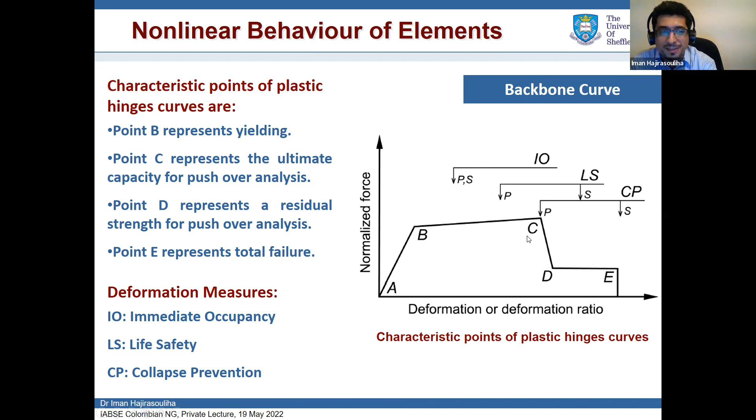Professor, yes? Iman, yes, sorry for interrupting. Sure. We have 10 minutes left. Sure, I'll try to go faster. Yeah, thank you very much.

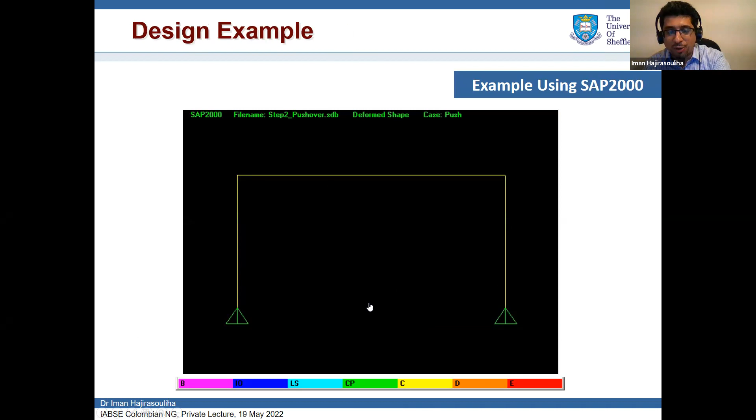They're almost okay. So what we do is we have these numbers, and we model our structure based on these numbers that are already provided. Let me give you an example. This is the building, I use SAP 2000, and those numbers are already included. You see that after an analysis based on the rotation of the elements, it says this hinge and hinge are in immediate occupancy, and this hinge and hinge are in life safety. So it's very easy to find the response - the good software like SAP already has it.

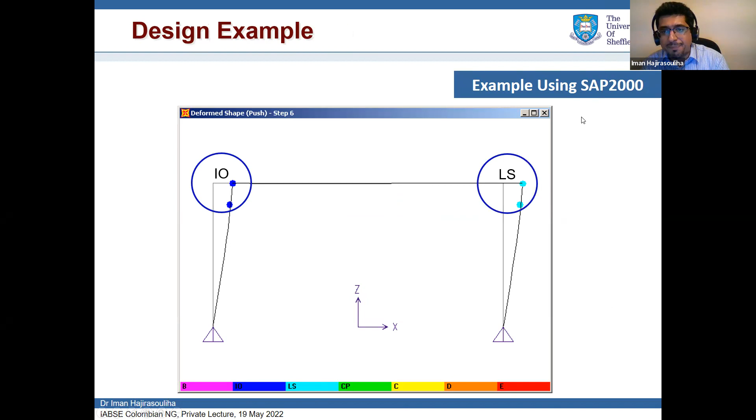The last part of my presentation, which I'll go through briefly, is performance optimization, performance-based optimization. Now we learned how to design for performance-based approaches, let's see how we can optimize the design. This is a challenging area, because the system is inelastic.

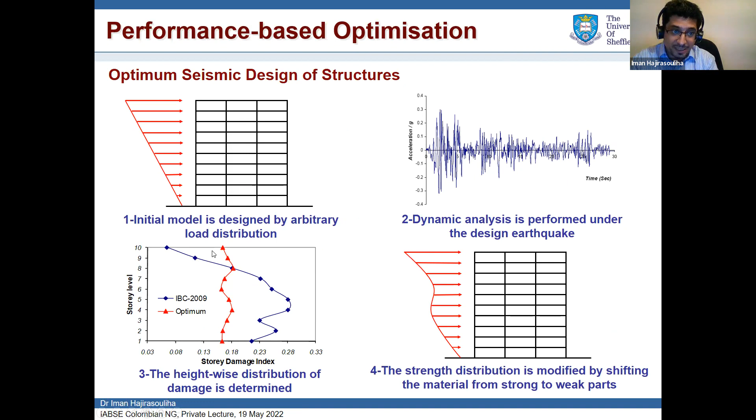It means instead of using this load, you use a different load pattern. I have about 10 or 12 publications in this area, and I realized that this optimum load pattern, which distributes the damage uniformly and uses the capacity of the building everywhere, is different - it depends on the period and ductility of the building. You know the definition of ductility. So the codes generally don't consider ductility, they just look at the period.

But I suggested a formula, a few papers on that you can see. If you use this formula, it can give you a load pattern - you design with it and have much better performance, because you distribute the damage uniformly based on the performance. I've applied this method for shear buildings, truss-like structures, steel frames, reinforced concrete, and FRP strengthening.

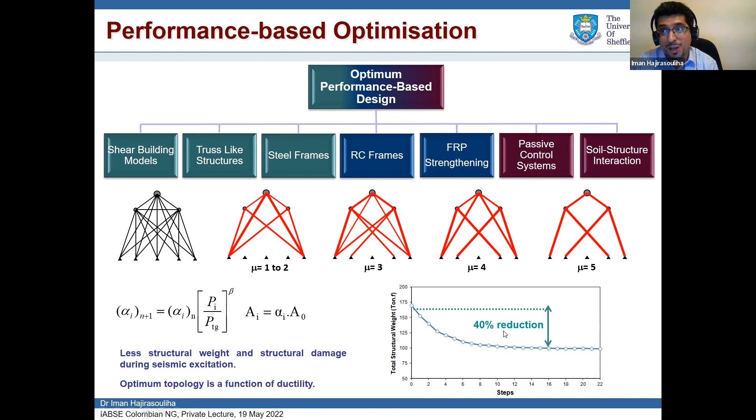So optimization methods that people use based on the elastic response are not accurate for seismic design. For seismic, we have to accept damage, we have to have nonlinear performance. So remember, 90% of the optimization methods go to the garbage now. One of the few methods that can be applied is this optimum performance-based design method that we've developed for years, and I realized that by using this, I can reduce the weight of the structure by 40%. So I can give you a structure that is 40% lighter.

I applied this method for more efficient design of steel structures. You see it here for the bracing system. These are the equations that I use. This system can optimize the response very, very quickly.

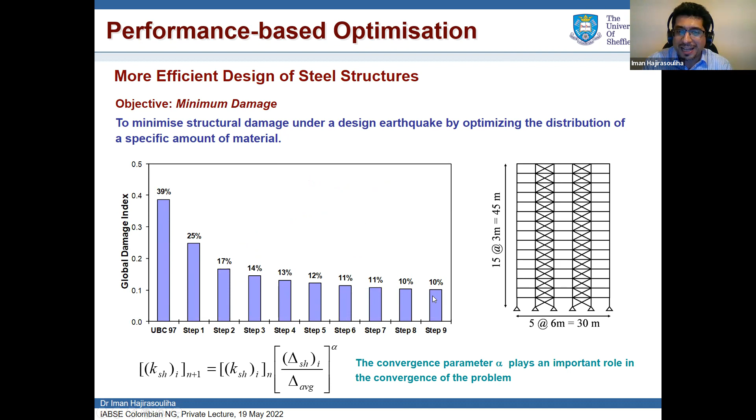And here I checked the damage, step by step. This is the code design, the design that you do now if you use your code. And this is the design that after my proposed performance-based optimization, you will see that you reduce the damage after 4 iterations significantly, from 40 to less than 15%.

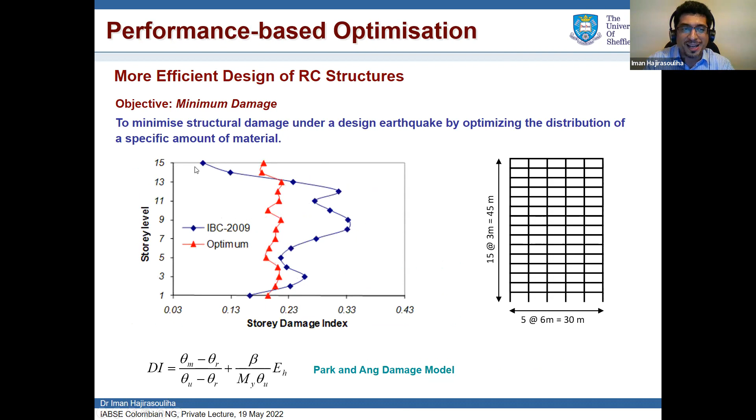Yes, amazing. We apply that for the other type of structural systems. Here is the way that we apply for reinforced concrete frames, and you see the response. This is the original design based on IBC, and after a few steps, this is the one that we optimized. You see here, damage is uniformly distributed, and the overall damage is much, much less than what the code says. We move the material from parts that we didn't use to the parts that we really need.

Original structure was 30% damage. We reduced the damage to 20%. So basically, considerable reduction if you look at the ratio.

I told you, for normal cases I have papers that compare with GA or particle swarm optimization. You can even do it by Excel, but under normal circumstances you need close to 1,000 analyses. So something that we optimized with GA where the computer was running for 3 or 6 months, with my method we can have the answer in 1 hour instead of 3 months.